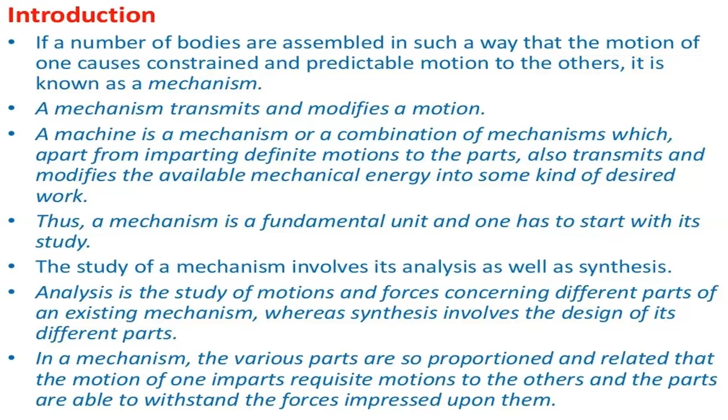Next, in Kinematics of Machinery, we need to define what is kinematics and what is dynamics. There are two kinds of motion - kinematics and dynamics. First, kinematics deals with the relative motions of different parts of a mechanism, which does not involve the forces producing the motions. This involves only the degrees of freedom here, but not any types of forces.

Next, it is the study from a geometrical point of view to know the displacement, velocity and acceleration of a part of a mechanism. So kinematics involves only the displacement, velocity and acceleration of a part of a mechanism, and does not involve any kinds of forces or reactions.

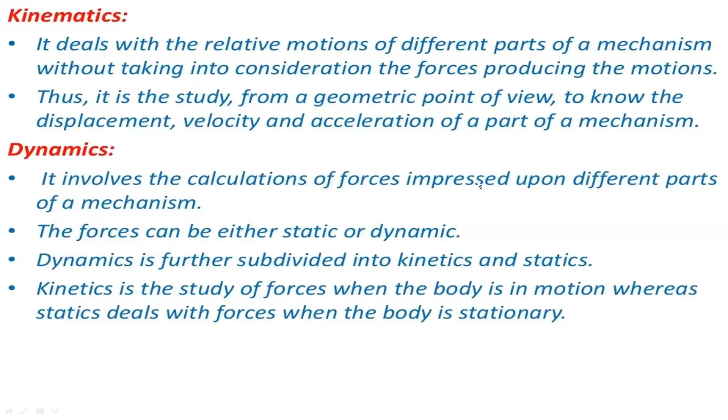Next, going to the next slide, we are going to define the kinematic link, or it is simply known as kinematic element. Each part of a machine or an assembled machine which moves relative to some other part is known as a kinematic link. So there is definitely some movement in the body or link or element.

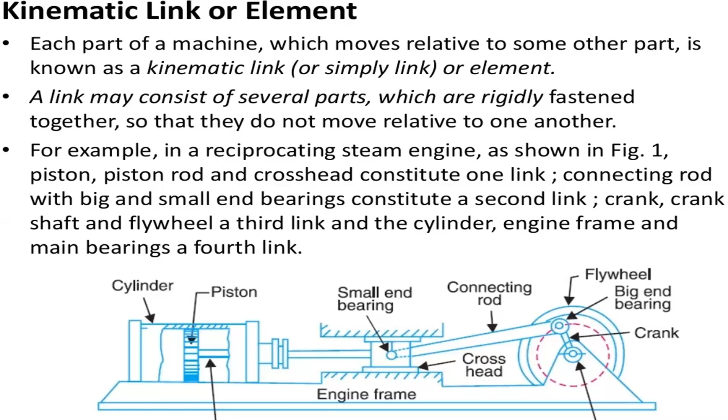Next, we need to see the different types of links here. In order to transmit motion from the driver to the follower, different types of links have been devised. Mainly there are three types of links: rigid link, flexible link and fluid link.

Coming to the first one, a rigid link is defined as one used to transmit motion, but it does not undergo any deformation. So that is ideal in nature, meaning a structure can be a rigid link.

There is no kind of motion in the rigid link, that is, there is no deformation in the rigid link, which is used to transmit motion.

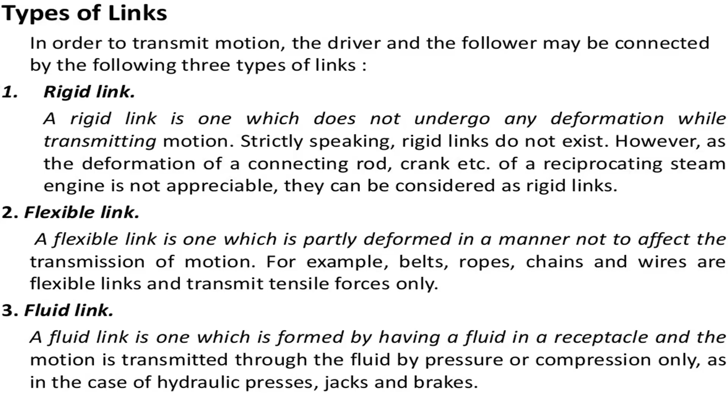Next one is the link. So what is the definition of the link and what are the different types of links here? So firstly, link is the name given to any body which has a definite relative motion to the other, and all materials have some elastic property, which is used to deform and change its position.

And next, a rigid link is the one whose deformations are so small that they can be neglected in determining the motion parameters of the link. So when we are transmitting the motion, the link has some deformation in it. So that is a negligible deformation. The deformation can be evaluated through different kinds of parameters. So it is the name given to the body which exhibits relative motion between one part and the other part.

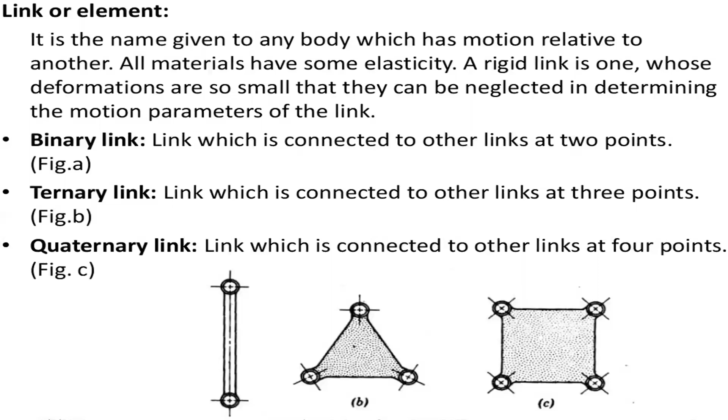Next one is the structure. So what is a structure? We need to define the structure. A structure is definitely rigid because there is no movement in the structure, but it is an assemblage of a number of resistant bodies, that is, a number of members. So you can see a number of pillars or beams in the structure.

So all these beams or pillars are known as members here, which have no relative motion between them and are meant for carrying loads only. So they have only straining action. For example, a railway bridge, a roof truss and machine frames are examples of a structure.

So you can see it in bridges and roofs. When we are arranging iron roofs or cement roofs, there are structures, and we see it in machine frames also. So these are all examples of a structure.

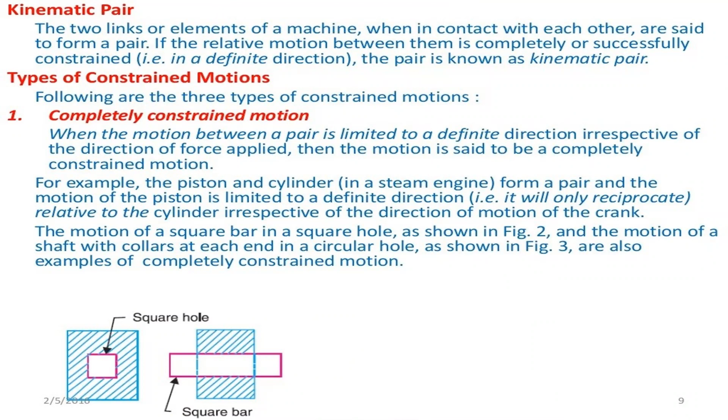So we can see three types. First one is the completely constrained motion, which applies in only one direction. Second one is the incompletely constrained motion, which applies in more than one direction. Third one is the successfully constrained motion, which applies in one direction. So these are all the different types of constrained motions in mechanisms.

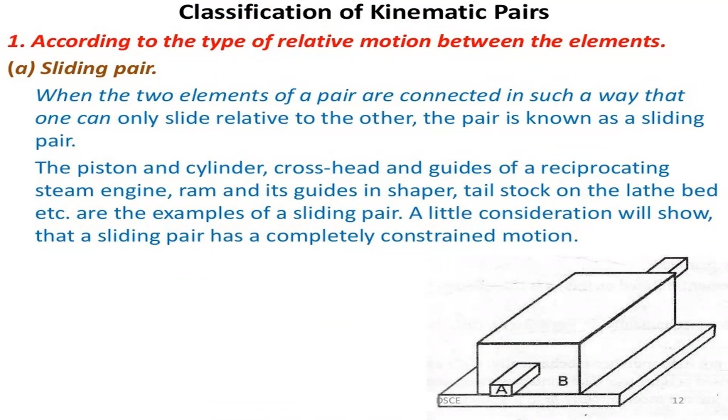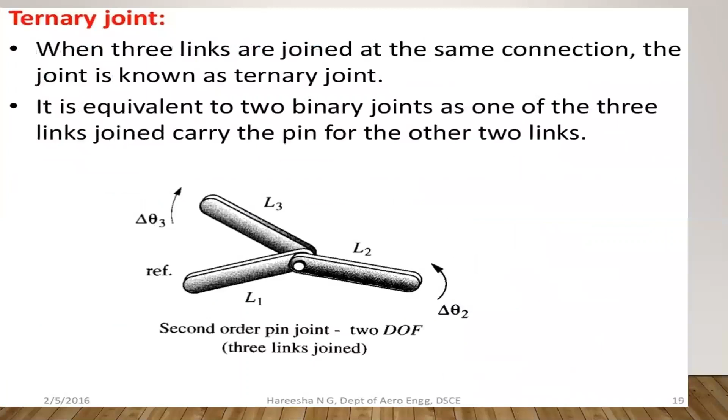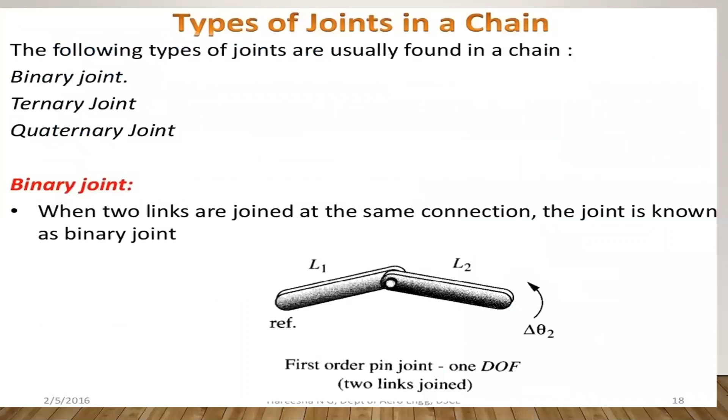So in the next class, we are going to see the different types of kinematic pairs. We have already seen what a kinematic pair is. We are going to classify the kinematic pairs, the types of kinematic pairs, and the different types of kinematic chain.